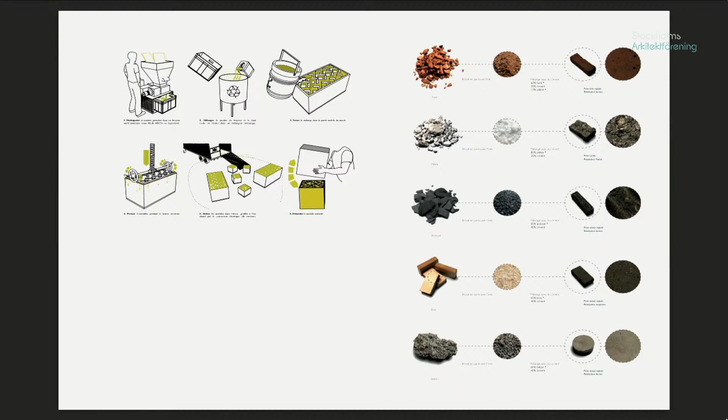From this question of coherence between the material and the environment, we were interested in 2009 in the capacity of material that has become generic all over the world - brick, wood, plastic, paper, and so on - to be implemented in order to respond to generic questions.

Initially, we made a proposal for a scenography competition for the Bauhaus Lab exhibition in Marseille, in the south of France. The request was for an adaptable, modular, mobile exhibition, like all exhibitions - this was quite common. We asked ourselves about the generic nature of matter: if the material is everywhere the same, why not present a process, a machine, which makes it possible to transform the material and thus produce, with each move to the exhibition, a new production of furniture that can be reused on site.

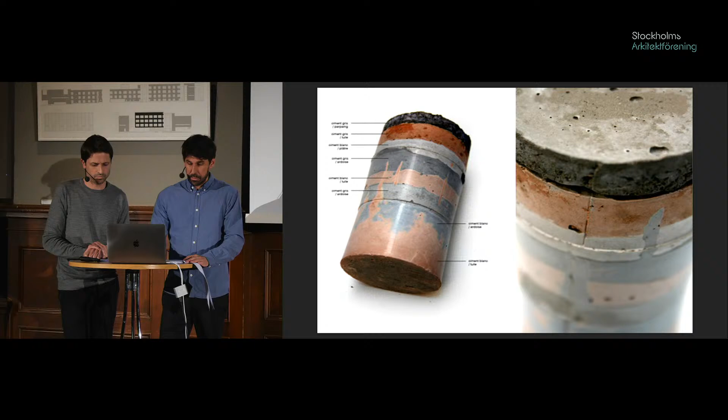This work finds its continuity in a collaboration we carried out with the artist Stéphane Chanclan from Paris, a Swiss and French artist, in which we worked on the social dimension of reused material by creating site concrete from demolition materials.

A few years later, we participated in an international workshop in Tokyo and Paris, bringing together 10 French architects and 10 Japanese architects. We worked on the old district of Yanaka in Tokyo, where this question of transformation through demolition and reuse is particularly relevant, especially in Japanese culture, where heritage is based on the know-how of transformation and not in the construction itself.

So we made bricks from material issued from the site. This work has been the subject of an exhibition in Paris and in Tokyo, at the Pavillon de l'Arsenal.

Finally, this work on the relationship between material and territory has also taken the form of more experimental practice, in particular with this project, the Soft City - La Ville Molle in French - during a workshop with the Art School of Bourges, near Paris, and the FRAC Centre, the regional fund for contemporary art of the center of France.

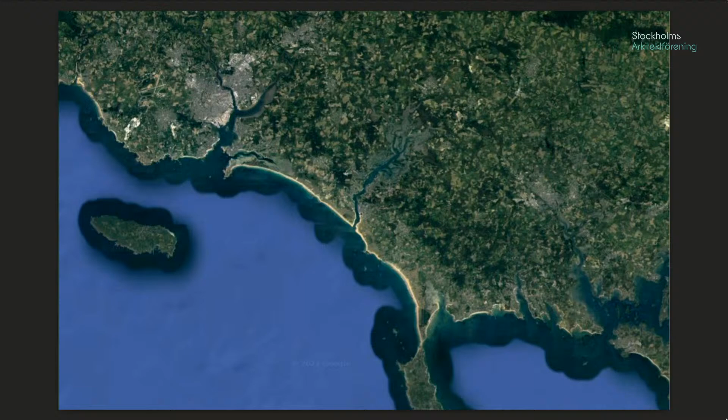This first project is our very first project. It's an oyster shed and a small shelter for an oyster farmer who worked alone and went a few days a week to the site in the south of French Brittany.

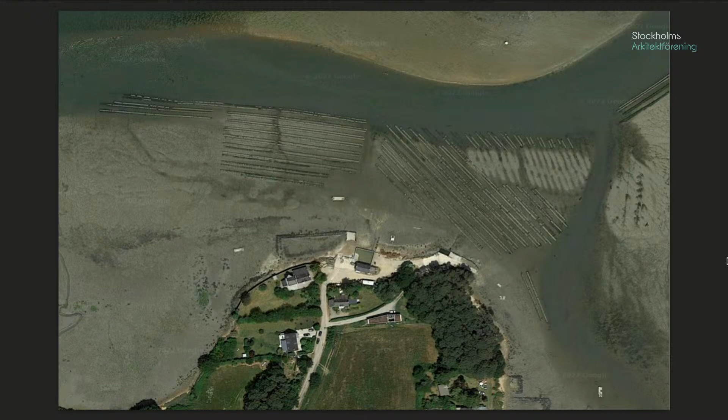It's not really a river, but a penetration of the sea into the land - a moving landscape which combines countryside and ocean, but perhaps more like the landscape here in Sweden. The aim of the project was multiple: to fit into a very narrow plot with a long building, built in wood to create a removable building in the protected coastal area, and to create a shelter, a very small living space that offers a frame on the landscape in order to discover it again after a day of work.

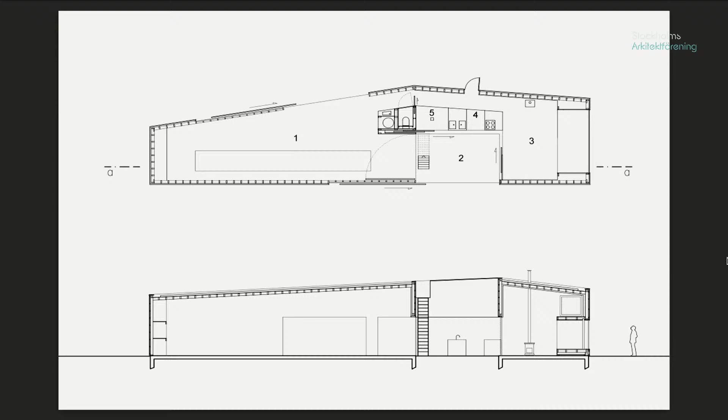You can see the site. This small and very simple project made it possible to experiment with effective constructive devices, in particular with the development of an open work facade and the work of large frames on the landscape, which very strongly qualifies the interior space of the building.

So this is the working space, the patio in between the working space and the living space, and the frame on the landscape. It also introduced a low-tech spirit we are working on. Here, the project is heated with a single wood stove, ventilation is natural, and all spaces receive natural light.

The interest of the project is in its hybrid character. It's neither a workplace nor a house, but an in-between architecture - something a little complicated - which has made it possible to create unconventional and continuous space without partitions and corridors.

Okay, 2 houses and 2 studios in Quiberon. This is our second built project, located in the same area as the first one, in South Brittany, in the summer spot of Quiberon. The city of Quiberon has a fairly typical center with mixed fabric of terraced houses and high density.

So the evolution of the urbanization of the city has given a much more spread out fabric of large houses in the center of the plot, with an urban rule which imposes a distance of 5 meters from the separating limits. So the project is on this one.

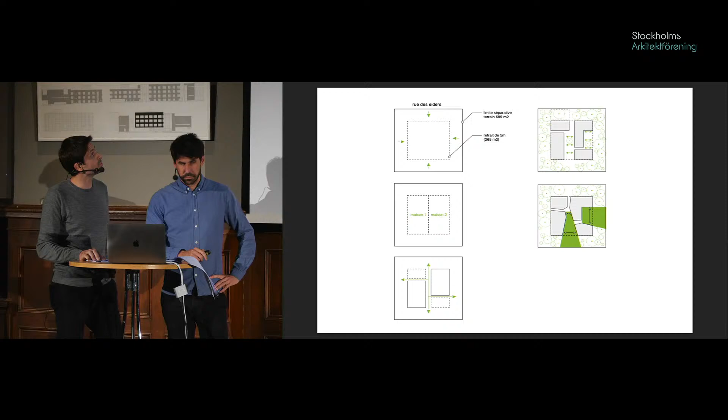Here the demand of the client was to build 2 houses for seasonal rental on the same plot. This is the diagram of the concept of the house. Our proposal was to change this initial demand, not into 2 houses of 3 bedrooms each, but into 4 entities. One house was linked with one studio.

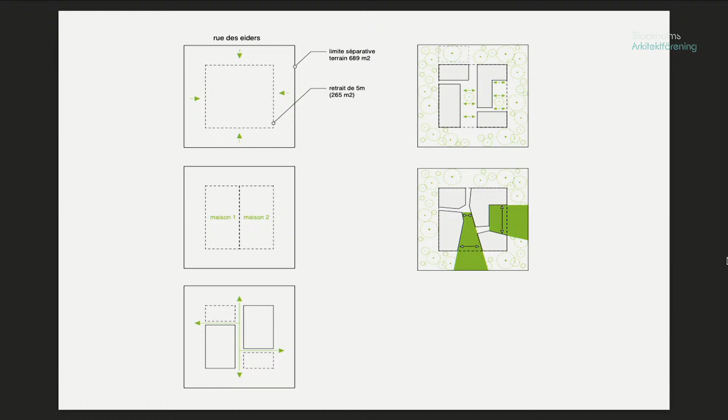So you see just here the first house on the left with a studio above a car park here, and the second one linked with a terrace with the other studio here.

So we find a particular attention to the relations between the interior and the exterior, as well as the spatial devices that we could qualify as relational. So we provide large openings, sliding glazing doors, that open onto the terrace. This project initiated a particular work on this subject, quite constant in all of our projects, where we seek to experiment beyond the uses of each space, the way in which their connection can increase and totally transform the architecture.

This third project comes directly from the first one. It's a 69 square meter holiday home located along the Gulf of Morbihan, le Golfe du Morbihan, in a territory similar to the oyster farm hangar, the first one we showed you.

The coastal territory of the Presqu'île de Rhuys Peninsula has also suffered from urban sprawl. If the first village took the form of a relatively dense hamlet, which knew how to save natural and agricultural space, the urbanization of the last 50 years has spread along the coastal road in the form of disseminated and generic houses.

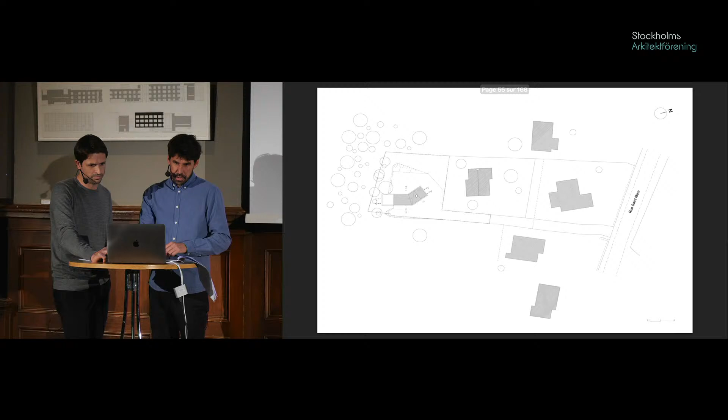We are here in a symptomatic form of urbanization, a plot separated into 3 entities in order to build 3 different houses unrelated to the place.

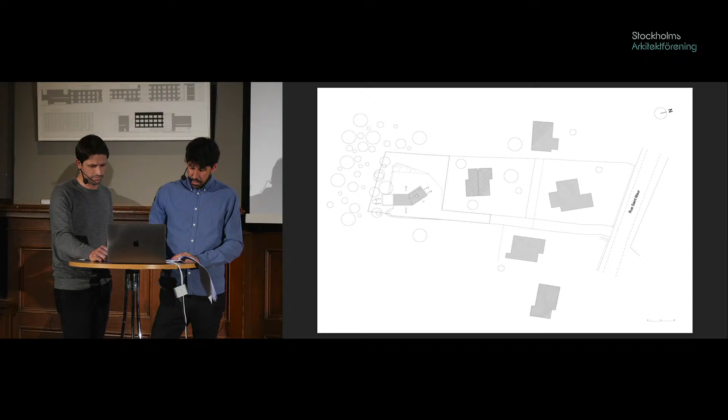The design approach of the project was imposed in reaction to this observation. The project clearly wants to be part of the wood and refuse any relationships with the 2 houses along the road. It's what you see over there.

The project used the same constructive device in wood, black stained, offering radical relations to the landscape and the outside. A patio protected from the wind, you see at the back. At the back over there. A continuity between the living room and the terrace in the garden, and this is the large window framed towards the landscape.

One of the main characteristics of the project is its small surface. The master bedroom benefits from the large window on the landscape, while the 2 children's bedrooms are designed as mobile closed beds, which allow them to sleep outside and then let the living room have more space.

So this is the living room with the 2 closed beds outside, and just after with 1 bed. Because this is a really small house. And this is the patio. It's a holiday house, so the child could sleep outside. It's not so cold in this area. But it's raining sometimes.

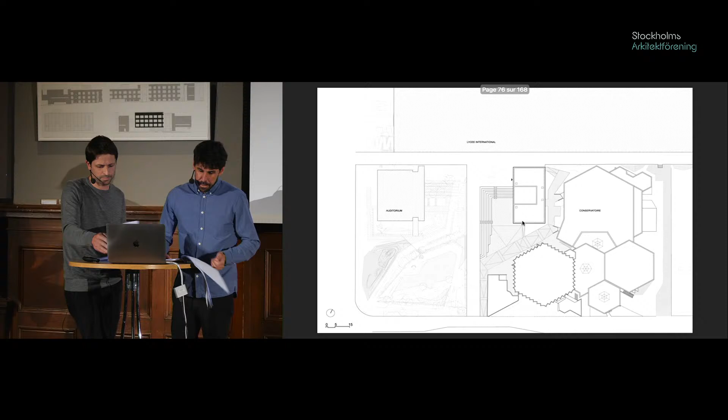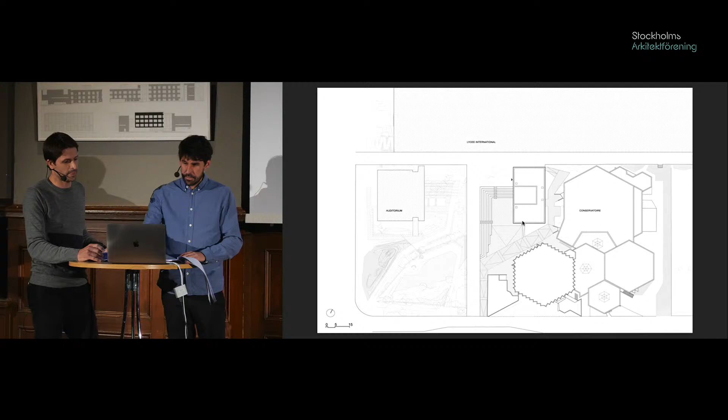This is the location of the extension, the existing conservatoire, and this is our project here. The three main ideas of the project are presented in this drawing.

We manage the topography in order to offer a space in addition to the program, as shown on the plan. This is additional space we create.

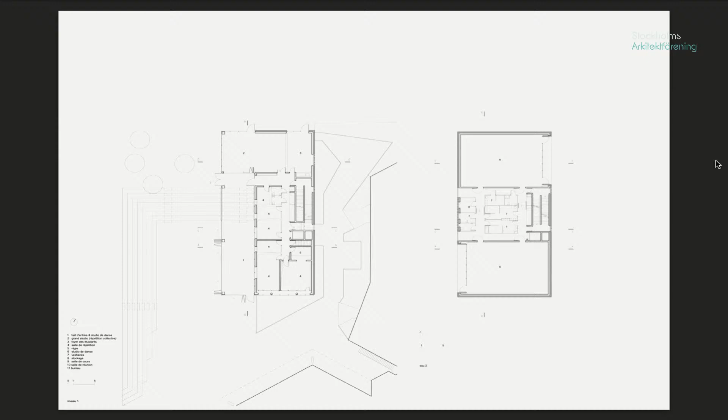The dance hall is totally open to the city. There's a distribution of dance and music space, totally mixed and evenly distributed across the different levels of the building, so you don't have a level of dance and a level of music—it's completely mixed throughout. You have dance studios here and music rooms here, with visual relationships between these spaces.

Here we see the very compact building in its context. The desire to open the dance studio is linked to the quality of the workspace and the very high priority we gave to natural light in the rooms.

This openness also seems very contemporary to us. The relationship to public space and the city has transformed artistic practices. You can see from the outside the activities inside the building, from the street, and seeing artistic activities from the street does not only qualify architecture for us, but this relationship also marks the evolution of the intimacy of these practices.

And there's the very question of image with social networks today. So we can open the dance studio as well.

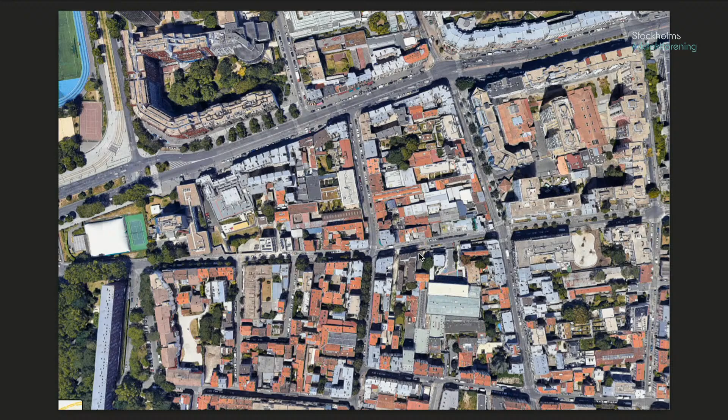The project is part of the city's approach to urban renewal, in order to reduce the large number of unsanitary housing units present in this area. The main idea of the project is to extend the suburban fabric of the district in order to preserve the urban scale and avoid the construction of buildings with excessively long facades.

Beyond the small scale of the building, the interest of this suburban fabric is to offer different volumes and scales, and diversity of view and orientation for the apartments. The work on the plans was done in order to offer housing on each corner of the building, so that the living rooms benefit from a real double orientation.

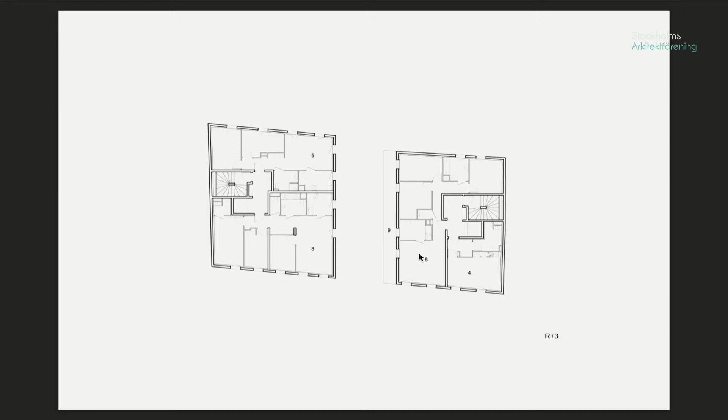The volumetric fragmentation offers outdoor space for the dwellings. The construction is quite simple, based on the repetition of a single window detail and size, and the use of brick with color changes using only 2 colors.

These are the outside spaces for the upper level apartments, and the view over the roofs.

Okay, so we're going to talk about another project, a different one. This is a technical project, a trucks maintenance center in Brittany again, in North Brittany. This project is located in northern Brittany and brings together road maintenance services on the site.

This project is technical and is above all guided by several elements: vehicle traffic, safety for the workers, and functionality of the site. So beyond the technique, the main issue can be found again in the relationships with the landscape.

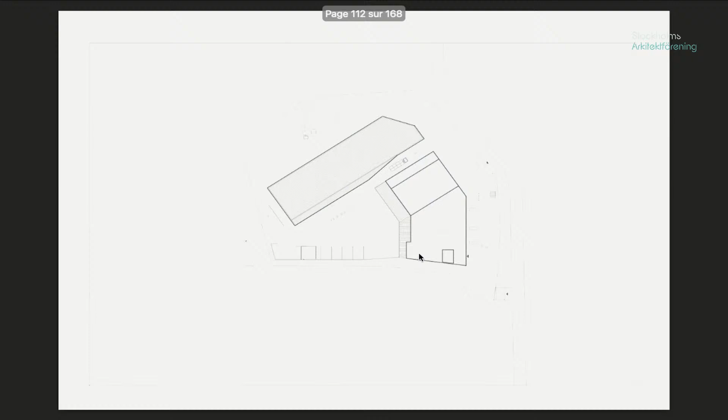So this is the plot. It's the flat architectural landscape. This is a plan of the building on the plot. The project consists of three main parts: a vehicle parking lot over there, the hangar, a maintenance workshop over here, which is the highest space in the project, combined with some technical rooms and offices over here.

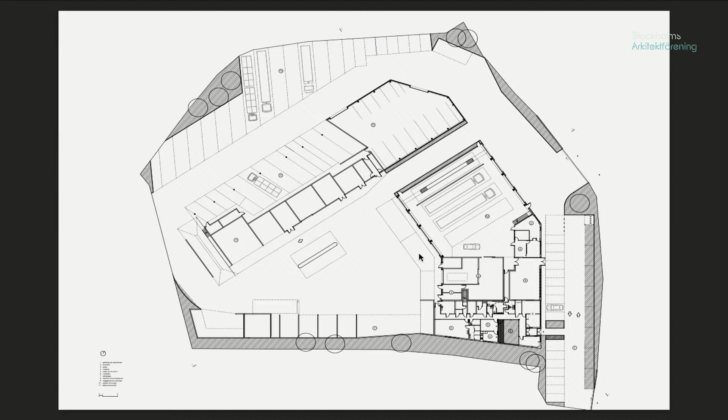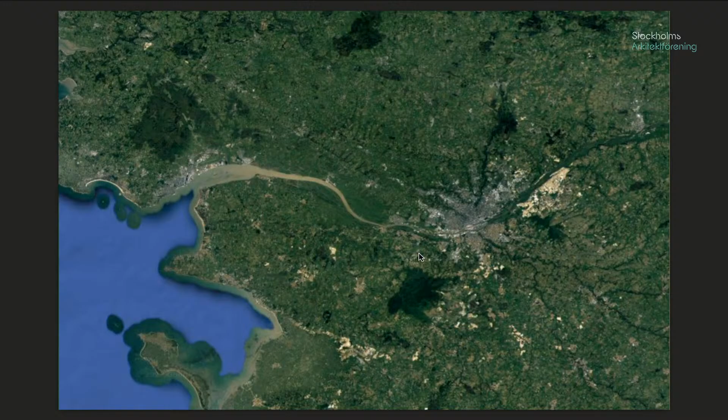So the Pierre Blanche Cultural Center, Pierre Blanche meaning white stone in French, is an important project for us, like all the projects, but it's this one which was awarded the French National Prize of the Équerre d'Argent. So it's a little important for us.

It's located in the city of Saint-Jean-de-Boiseau, in the suburb of Nantes metropolis. This is Nantes, and the project is over here. It also has a special location in the city of Saint-Jean-de-Boiseau, because it is also on the suburb of the city center.

So this is a site on the outskirts of the periphery, with no quality for us, with a very common suburban fabric, and you see football playgrounds in the south. When we first visited the site, we noticed that there is something interesting in the south here, a beautiful little wood, well oriented. So we decided to make a connection with the woods in the south of the plot.

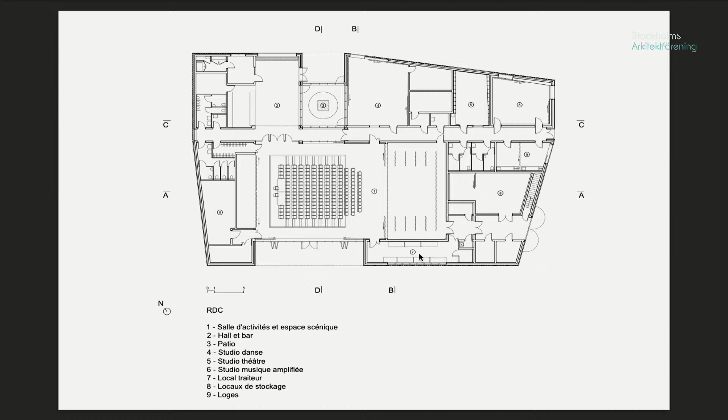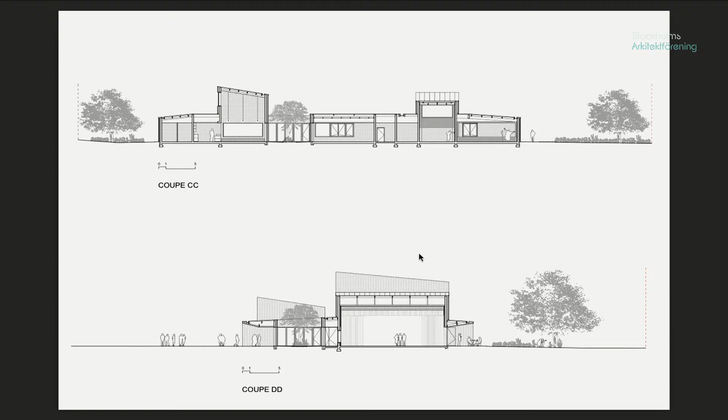This project is entirely in double brick wall again, allowing us, as we did for the Nantes Conservatoire, to keep the raw concrete inside and to manage the ventilation system outside behind the brick moucharabieh.

So this system also provides large windows, large openings towards the landscape, in order to make a specific atmosphere for each interior space and to qualify the facade according to the uses.

So this is the theater room here. You have the hall, the lobby hall, and the main stage here. The brick moucharabieh also turns around inside the performance hall in order to ensure acoustic treatment.

So this is the main circulation in the building. This is a crossing circulation that separates the performance hall from the other rooms. We try to make many transparencies between the spaces, even if they are separated by this corridor.

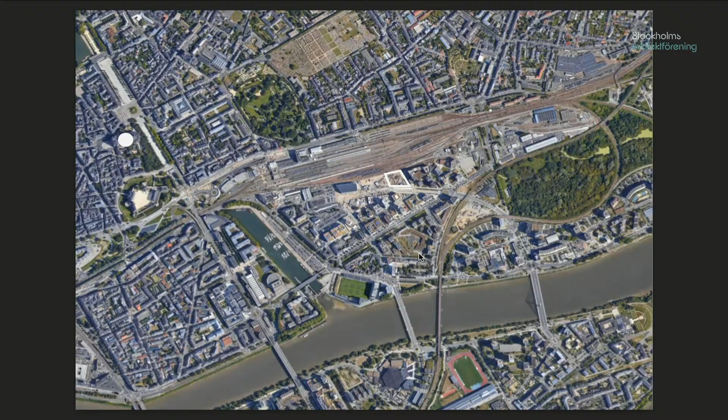Okay, this is the last project we show you this evening. It's one of our latest built projects. It's also located in Nantes, next to the train station. The district of the project is mainly made of office buildings that have been built in the last 30 years.

The idea of the urban project was to open up the district of social housing Malakoff over there, to the east of the site, to the center of the city over there with the castle.

And with a more mixed architecture and mixed program. The program of the project for us consists of three different entities.

The office for the French railway company, a public car park, and a housing tower block of 33 apartments. The main idea of the project was to clearly separate the programmatic entities. This project is the quite bigger one that we have done.

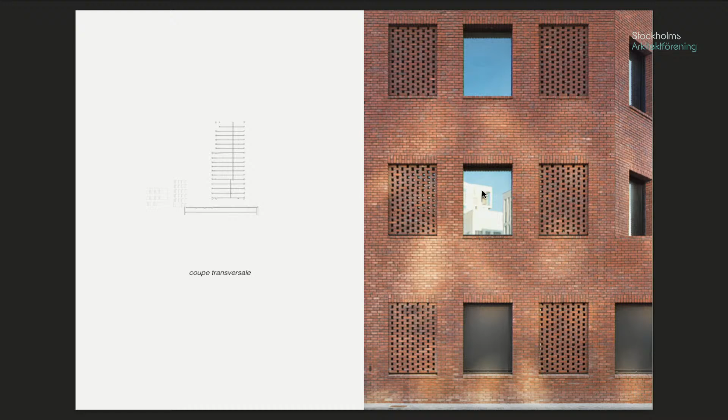This is the railway company offices facade. So we use brick again, and large fixed glazed windows, openings behind the moucharabieh bricks. This system is particularly interesting here because of a special need required for office security.

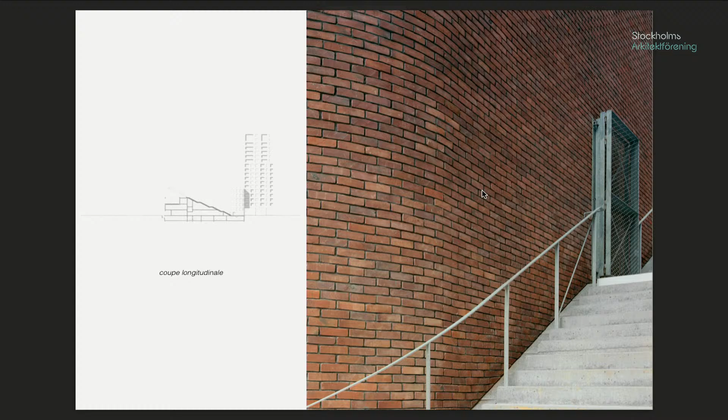This is the concrete staircase we saw before, and a little ramp, with a relatively low technical detail. This is something we like.

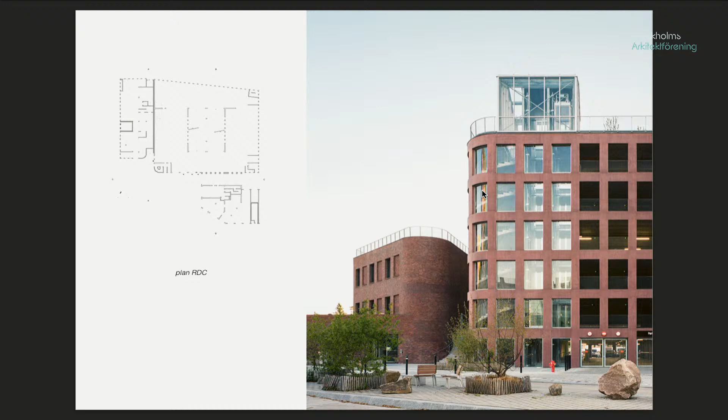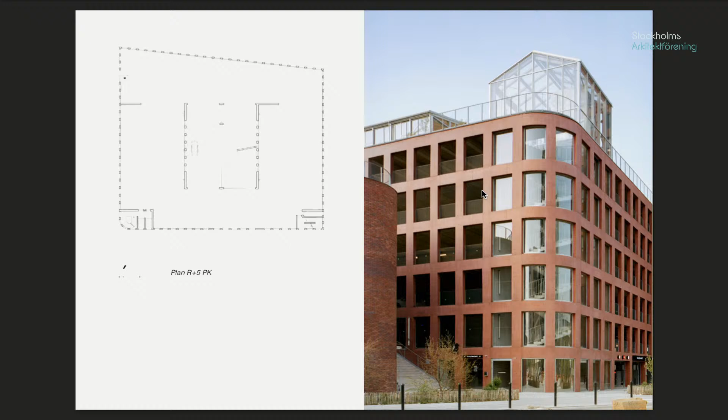Let's focus a little on the plan and organization. This is the plan of the car park. There are two inverted ramps in the center, one for going up and the other for going down. It's really a simple system of organization, and you have the places for cars around this ramp.

The structure is in red concrete, and it allows future transformation, maybe because of the ceiling height, into housing or offices. The frame of the car park facade is sized to prevent cars from falling without the need of any additional structure.

This is a ramp, and this is the end of the ramp on the roof. You see the office building here with the garden, around the ramp.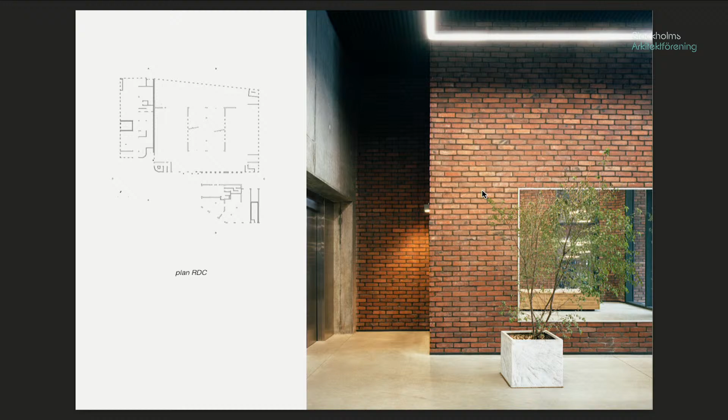The residential tower is shaped by the constraints of the neighborhood: the boulevard in front of the tower, the adjoining building on the right here, and the car park. The shape is created by the limits of the plot and provides a certain diversity and different housing plans for each apartment.

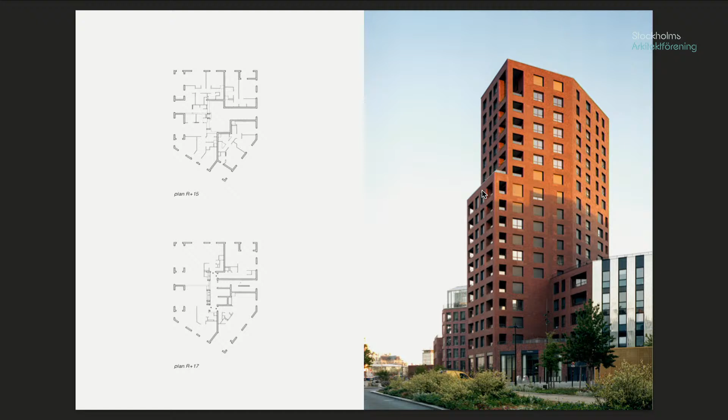This diversity resulting from urban integration interested us since it enables housing with very specific identities. As we saw in the social housing project in Pantin, we tried to systematically put living rooms into the corners so that we can have multiple orientations. This is apartments at the top.

As a conclusion—because you have finished. Was short.

Regarding the first image we presented, our practice tries to focus on the relationship between material, site, and program by seeking simplicity, coherence, and radicality. We teach in a school of architecture in Nantes and in Paris, but mainly in Nantes, and we work with our students on the territories in crisis in which we live. The crisis is now political, social, and environmental, and if we must act above all as citizens, we believe that architecture is a very good tool to deal with these issues. So, thank you.